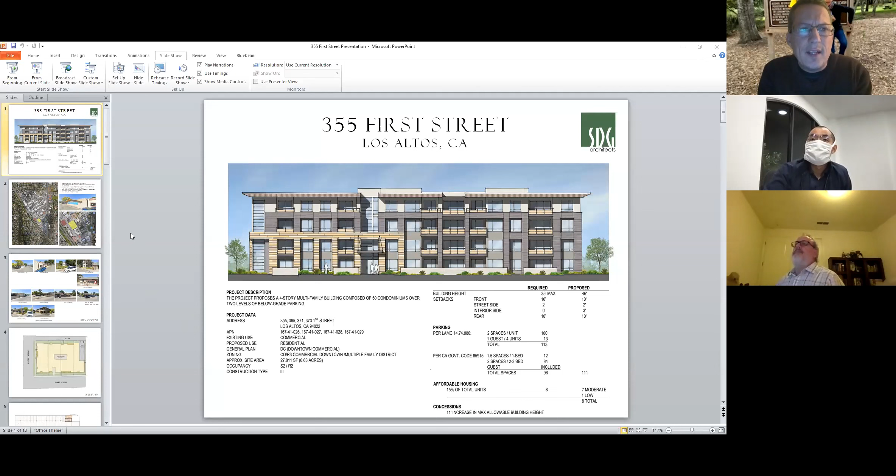A foundational principle of good urban planning is to do outreach to the community. At the end of the day, the community is the one that lives with these projects, not me. So I always try to do a lot of outreach for any major project I work on. On top of that, this is an SB 330 project, and when the formal submittal is given, we're limited to 5 meetings total for these types of projects.

So on top of my normal desire to do outreach, we have some statutory limitations. I requested, and the applicant agreed, to have this community meeting. There will be multiple bites at the apple: January 21st we're having a study session with the city council, and on January 27th there will be a meeting with the Complete Streets Commission to talk about the project. So whoever's on the call, you have multiple bites at the apple.

If you have written comments, please give them to me. SB 330 is written into the law - there's 2 phases, the pre-app phase and the formal. My goal at the end of the pre-app is to give the applicant written comments that we get from the meeting minutes from Planning Commission, Complete Streets, and hopefully people can all just identify your name and address, then give your comments so the admin person typing the minutes can prepare them, and I can package those all up and give them to the customer.

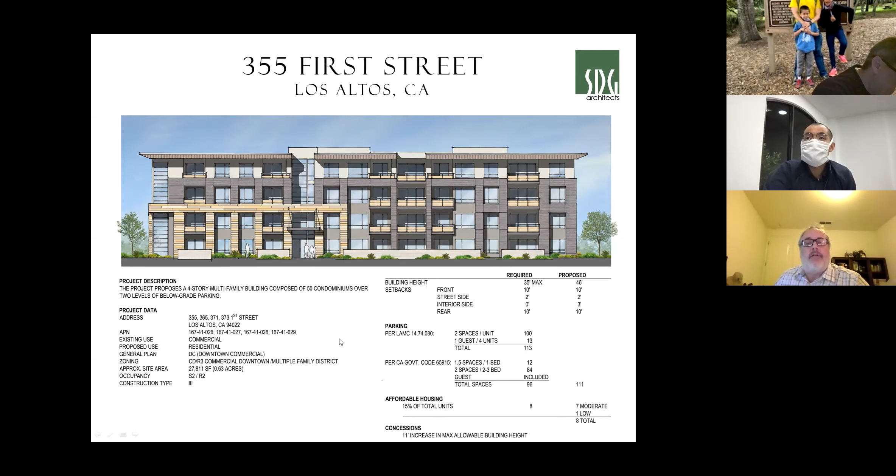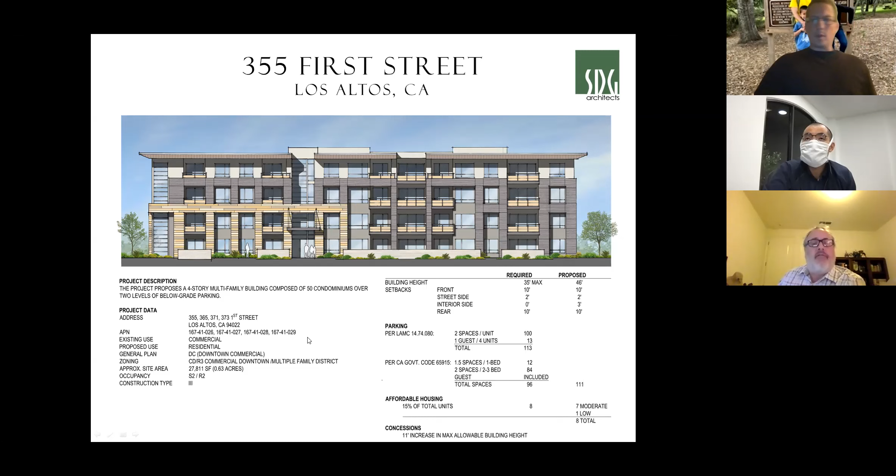The project we're presenting tonight is a 50-unit condo building on First Street. It is proposed to be 4 stories tall at 46 feet, which is the base height plus the density bonus height of 11 feet. This is a 0.63 acre site in all, comprised of 4 sites. We have about a 2.86 FAR, and all of these items are similar to other developments that have been proposed and approved in town.

So to get you familiar with the location, the project is on the corner of Whitney and First Street in the greater downtown context. It's along First Street about halfway up towards Main. There's several other projects that have been approved and are either under construction or getting there - at Lyell, at 389, down at the corner here, as well as a couple other proposals in the area.

So again, we're fronting on First, with a side elevation along Whitney, and an alley along the rear which will be getting widened by 2 feet. This site has a walk score of 90 and a bike score of 95, meaning it's a walker's paradise, close to all amenities. So we foresee a lot of folks getting around town on foot rather than getting their cars out frequently. All the parking is underground on this site and will be accessed from the rear.

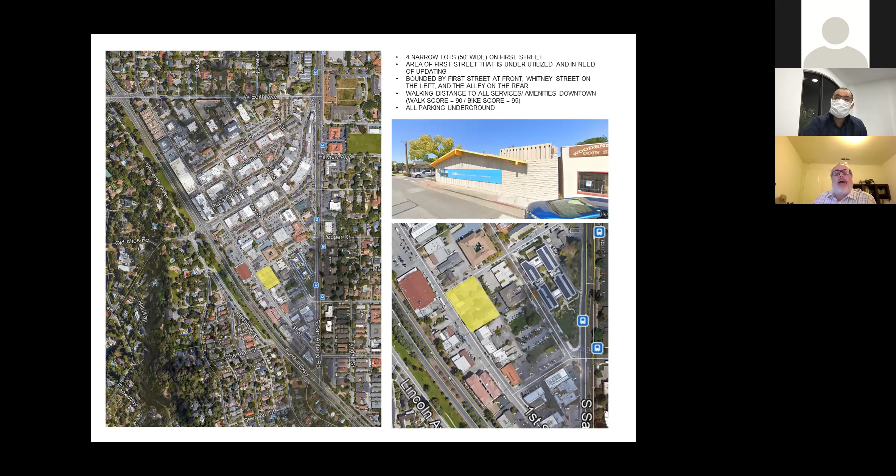So again, these are the 4 parcels that compose the site. You can see that they're fairly small, much older commercial buildings, or in this case, a house that had been turned into a commercial building. On those parcels, they're highly underutilized, and the structures on those are outdated and in need of updating.

You can see the adjacent uses across the street, Drager's and the restaurant, which is being processed now. And then along Whitney, there's an office building at the back corner of the lot, and adjacent across Whitney is another office building.

The site is comprised of these four 50-foot wide lots, totaling 0.63 acres. We've designed the project with the main entry splitting the building into a couple of components facing along First Street. Parking will be accessed via a ramp underneath the building off of the alley, and we have enhanced setback areas along the corners where we'll design an enhanced landscape feature.

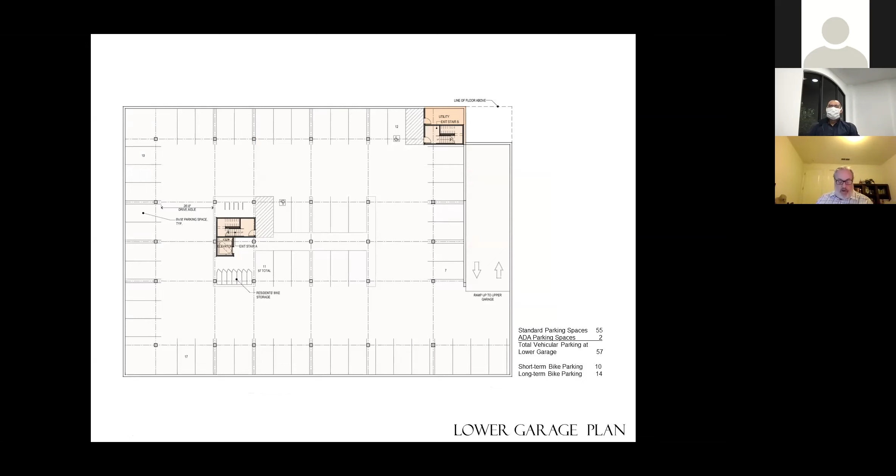There are two floors of underground parking, with 111 stalls currently designed—15 more than required by state law and 2 less than required by the city's base parking. As we move through workshops and complete streets review, it's important to note that with a fairly limited waiver in parking stall width, we could easily add at least 4 more parking stalls to this garage, which may be something we work with the city on.

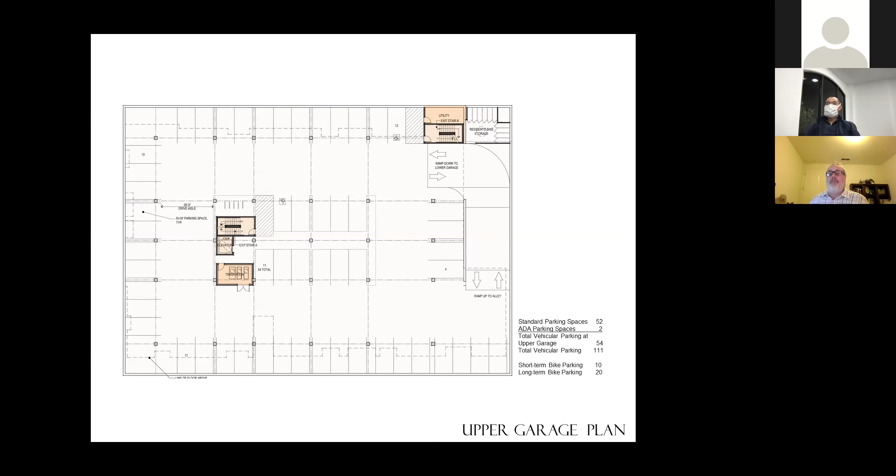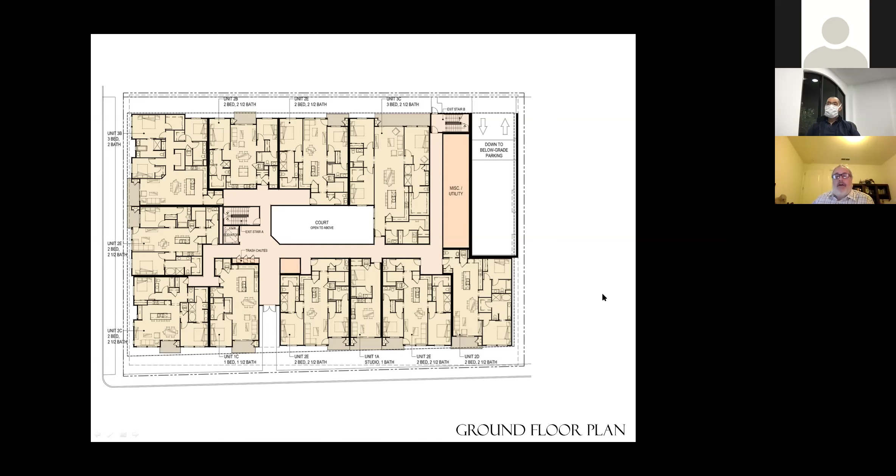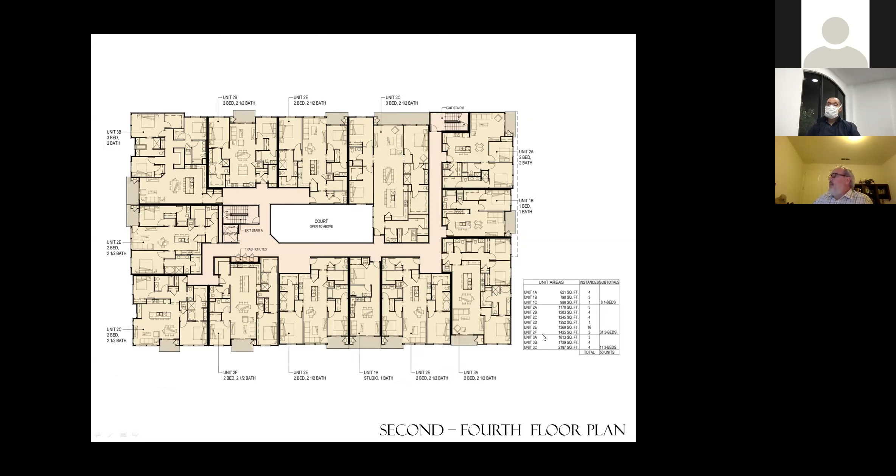We've got a mix of unit types in the project, from studios to 1-bedrooms, numerous 2-bedrooms, and a few larger 3-bedroom stacks around the edge of the building. So we've got a nice range of unit square footages, from about 620 square feet to about 2,200 square feet, and a wide variety of units.

The building elevation composition was designed to break down the scale of the building, using a layered mass of different massing elements and materials to create a layering effect, and also to provide a step back from the 1st and 2nd floors to the 3rd floor up to the 4th floor, allowing those materials to create that step back.

We've also broken up the building vertically to create several smaller massing elements with deeper slots at various locations, which helps to break down that mass. We've got a nicely defined base, a middle area, and then the top of the building with an enhanced parapet element to provide a nice line and accentuate those broken-up areas.

That parapet will be treated with a wood-type soffit on the underside to create a little warmth to that palette. The proportions of the windows, especially some of these horizontal windows, were designed to reflect the character of some of the older buildings in this district. The entry is set into one of these slots to create a nice focal point.

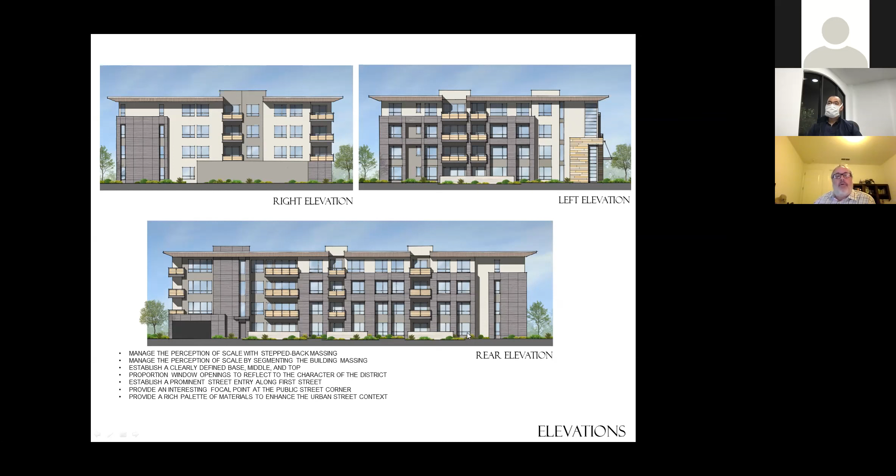And just a quick view of some of the other approved and existing structures along First Street here, tying in with the scale and mass of those buildings, creating this wrapped around element where we'll have an enhanced landscape element at the corner of the building, and creating these slots to break up that massing and create a nice rhythm as you go down the street, then wrapping that around down Whitney in a similar format.

And with that, that's a very quick overview.

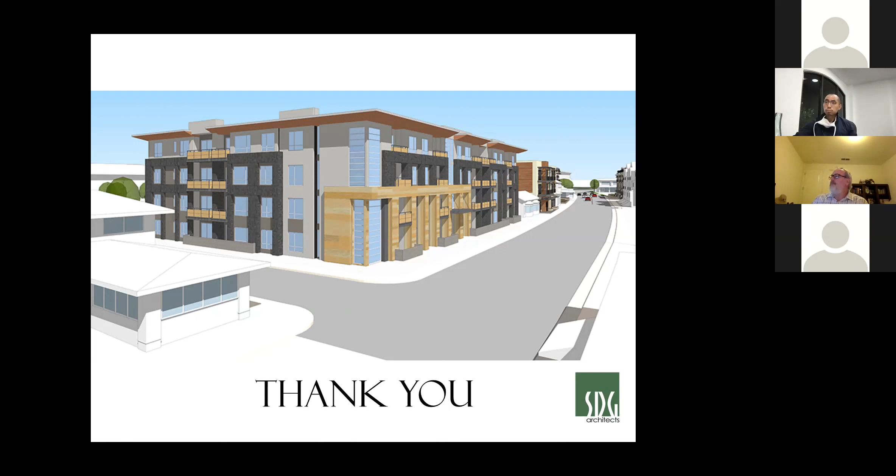So let me make a couple of additional comments. Jeff, you mentioned that this is similar to other projects in town, and actually this isn't. This project is significantly larger and more dense than any other residential project in downtown. And that is an issue. It doesn't mean you can't build it, but it means you have to be sensitive to your mass and bulk and how it's going to appear to people at the street level. And I think that's where this project needs significantly more work.

I will tell you that just from the appearance, it looks like a condominium in Miami. That's not Los Altos. It doesn't have the warmth, it doesn't have robust landscape. It lacks so many of the elements that we try to put in place in our town.

And I think a good example of a failed project in this town is 396 First Street. It's poorly done, it's bad materials, there's a lack of robust landscape, and it's basically a cube. This project risks being the same. My comments are not to derail the project, but to encourage you to come up with a project that's going to be more consistent with what we expect in Los Altos.

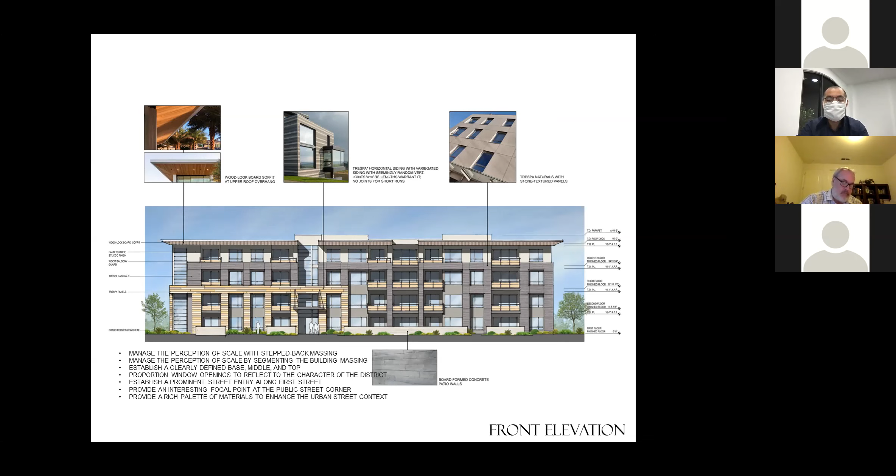Lastly, you should be aware that 371 First Street, I believe, may be a historic building that will require a CEQA evaluation, since any building with historic significance, potential historic significance over 50 years requires a historic evaluation. I'm saying that without having access to the historic records, but just looking at the building and its setback, I believe...

371 - you're not developing 373, are you? Yes. Okay, well, you probably need to check on 373 as well. All right.

So I've said a lot. I'm happy to provide clarification on any of the points I've made. I will be following up with Guido with written comments as well.

Great. That's what we're here for, to get comments.

Thank you. But I would encourage you all to think about better ways to notice these meetings. Guido, the meeting - if I go to the city's website and look under the community tab for private development, it doesn't notice this meeting. It doesn't say anything about what time the meeting is on the 21st.